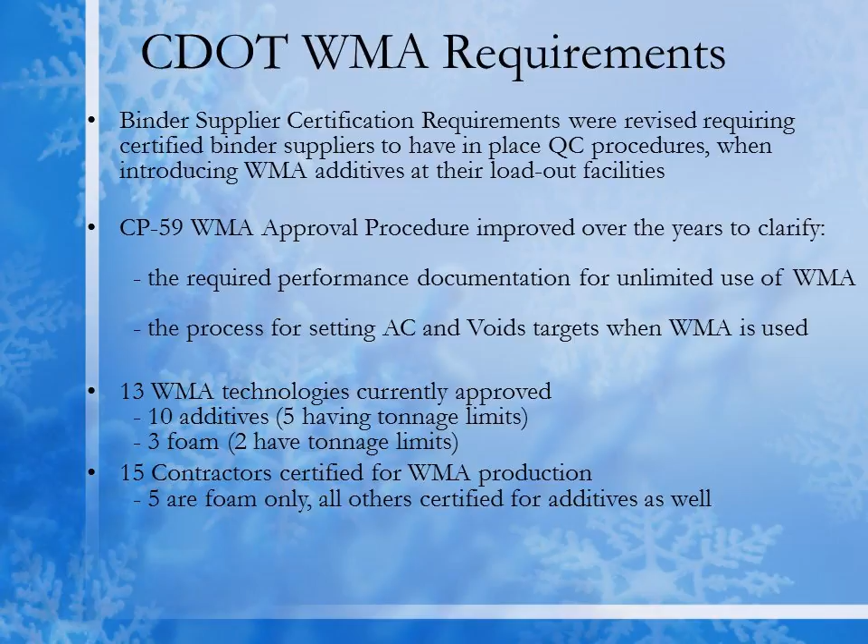Right now we have 13 technologies approved. 10 of those are additives, 3 are foams, and we have 15 contractors that are certified to produce warm mix on our projects at their discretion.

Let's go to the start of our warm mix use here in Colorado. It really started because we have challenging conditions to do typical construction in. I-70 west of Denver is one of the main corridors in our state and nationally to get from east to west and vice versa. It's largely how we supply our ski industry and all the other industries along this corridor. It is high elevation, and it has a lot of traffic, and it can be very challenging even where we're allowed to daytime pave in that particular corridor.

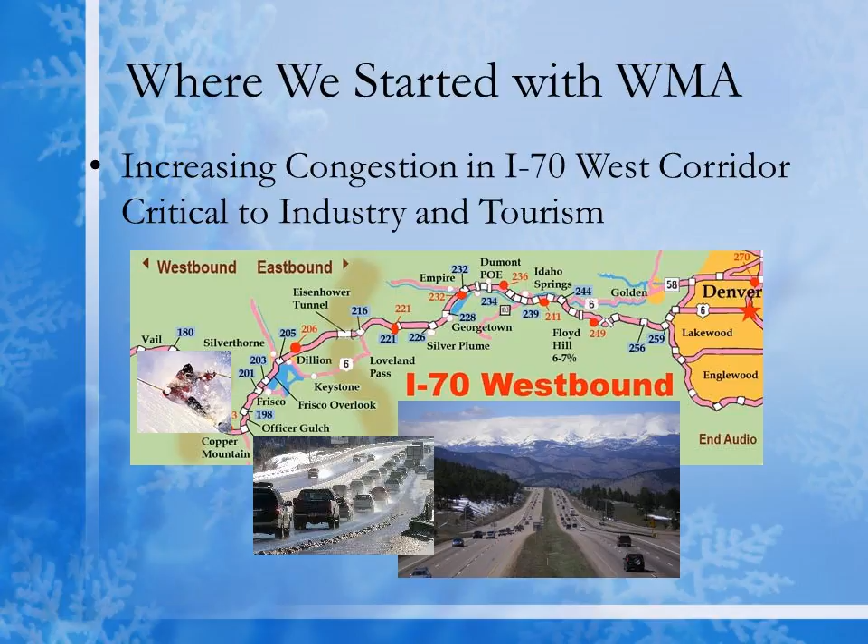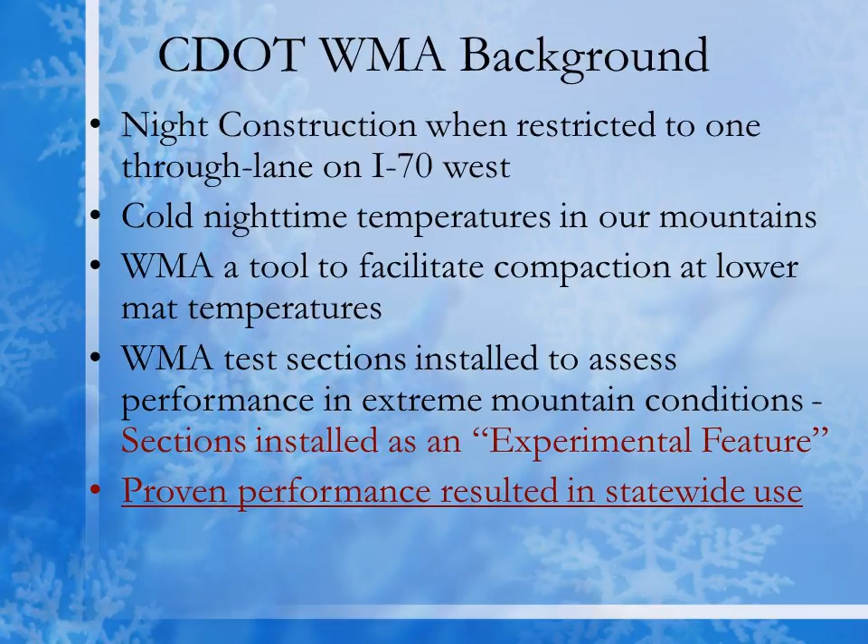Night construction is pretty frequent on I-70 because of traffic constraints, and at night it's even colder at 10,000 feet than it is during the daytime. As you can imagine, we use warm mix to facilitate compaction at those lower temperatures. We had test sections that we started with installing in probably the most challenging pavement condition in the United States, right at the Eisenhower Tunnel. I'll tell you about that a little bit. It performed very well, and we now have statewide use.

This project is 70 miles west of Denver. The lowest elevation is 8,800 feet, and it goes all the way up to the Continental Divide at 11,100 feet at the Eisenhower-Johnson Tunnel.

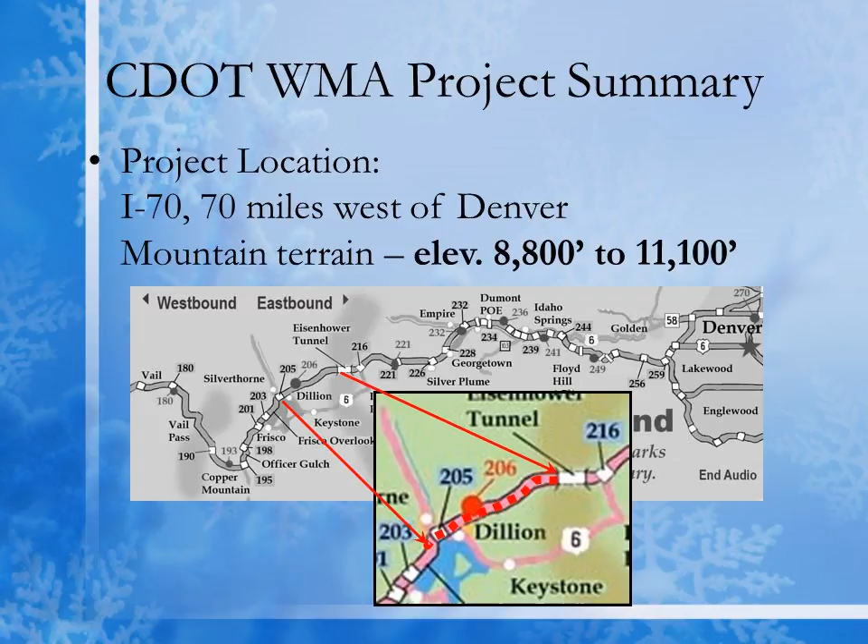Difficult conditions, 35 inches of precipitation a year on this project, 200 inches of snowfall. Look at the freeze-thaw cycles, pretty significant. It's a torture chamber for pavement. Very cool conditions in summer.

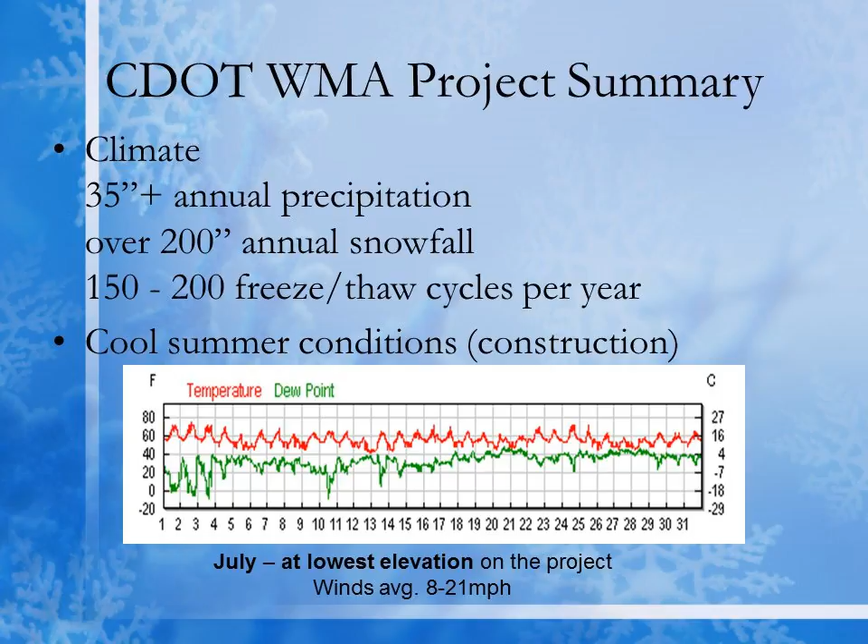I've already talked about this plot. This represents the lowest elevation on the project. It's much more challenging up near the Johnson Tunnel. 30,000 AADT, that was at the time of construction. It's higher than that now. 10% trucks. The project was designed for 4.85 million ESALs for a 10-year design.

Pretty extreme conditions in the winter. For those of you that have a Hamburg machine, it seems like child's play compared to the conditions that pavements have to withstand at this location. 65 of 76 days in the year after construction of this project, it snowed. 128 chain days—that means every truck is required to chain up before they can go up and over and through this project. So that's very, very hard on pavements, and that's where we built one of our primary warm mix test sections that got us going.

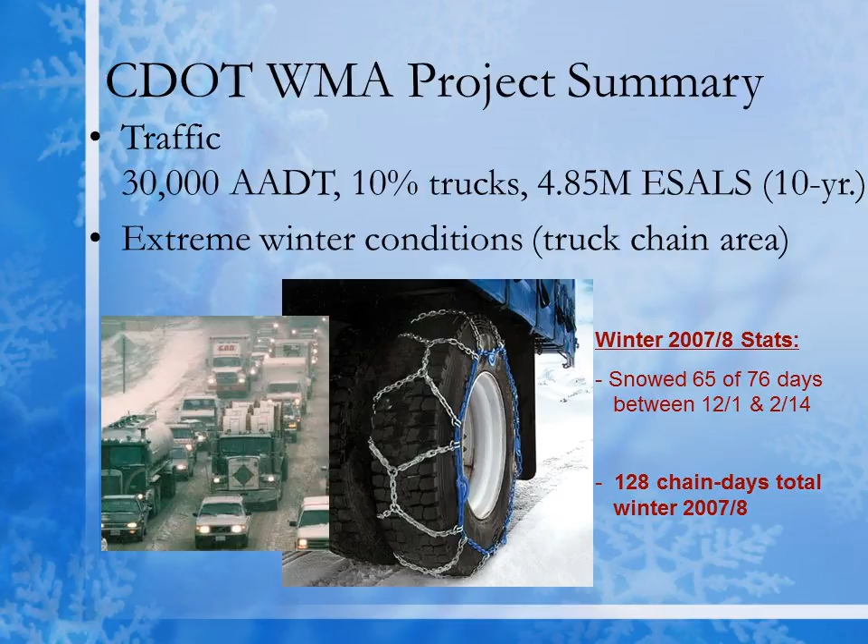This was a 2.5-inch mill and fill. We had Advera, Sasobit and Evotherm all demonstrated on this project. In our case, an SX mix in Colorado is a 1/2-inch nominal maximum mix, so you'll see that throughout. This was an SX mix, 58-28 binder, 75 gyration design, and full volumetrics for pay.

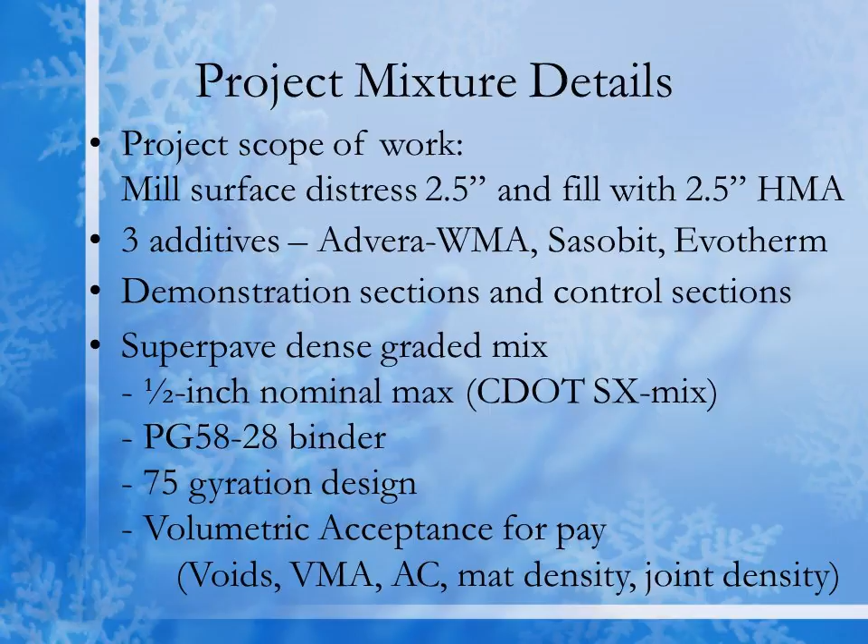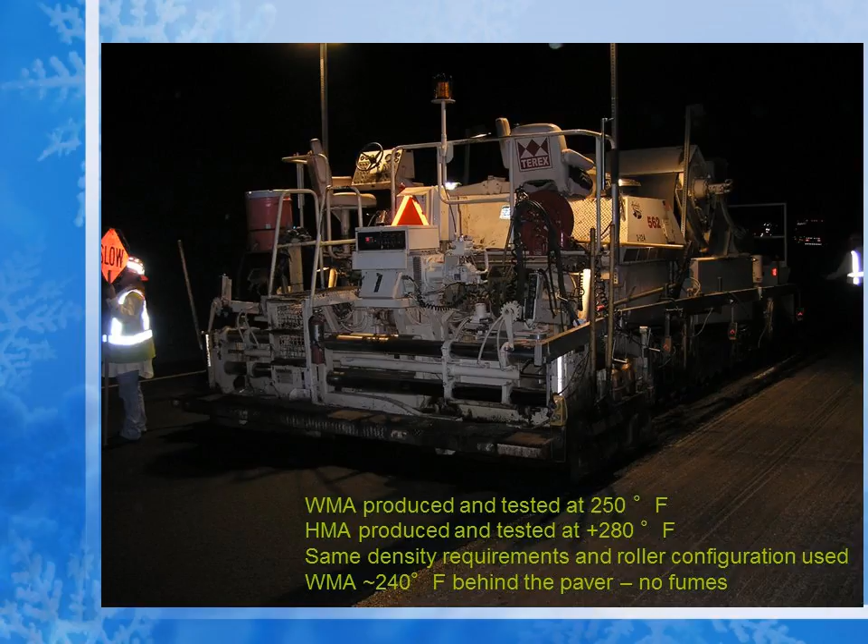The warm mix was produced at 250. The hot mix in the other sections on this job—we had a fully controlled demonstration project and then monitoring—was produced above 280 degrees. We had the same density requirements for both warm and hot mix, and the same compaction process was followed by the contractor. The warm mix was about 240 behind the paver. At nighttime at this elevation, in very thin air, you usually see a lot of fumes from hot mix. Not in this case.

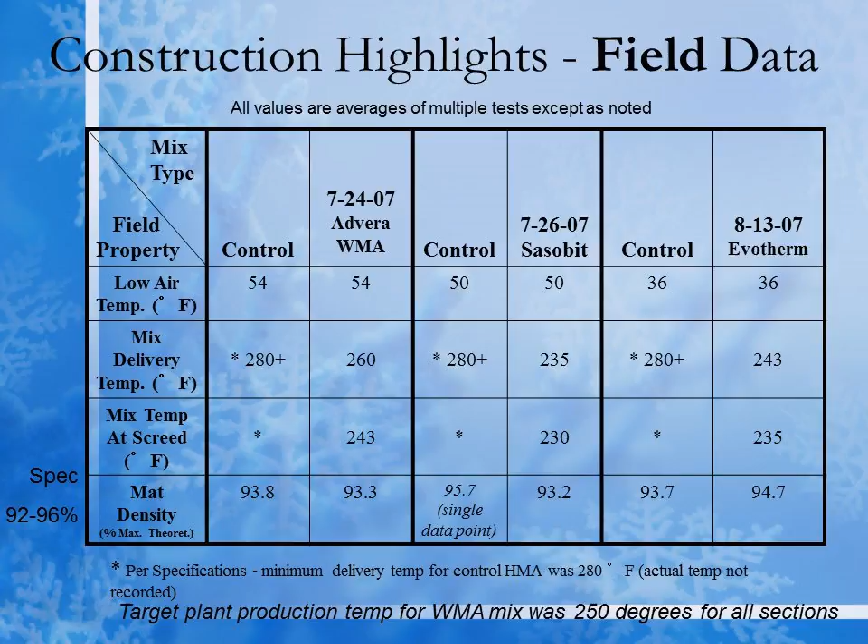We were down to 36 degrees paving on this particular project. You see the mix production temperatures there. It's worth noting the mix temperature at the screed—you can see right about where we needed to be throughout, 240 down to 230 for the mix behind the screed. Densities are all good, all within specification and comparable between hot and warm mix.

A little bit on the lab data, because it's worth noting that there will typically be an impact on laboratory voids due to the drop-in of an additive of any flavor. You can see we run all of our mix at our historic HMA laboratory compaction temperatures, which keeps us consistent and allows us to operate labs that test multiple projects.

We test them all at the 280 degree temperature as it was for this particular mix. We acknowledge that through testing up front, all prescribed in CP59, there's going to be an impact on volumetrics. We determine that at the start of the project, then set volumetric targets accordingly. In this case, we established lower volumetric targets for production because we're keeping the AC content at the hot mix level and adding the additive, which we know will impact voids, but we want to account for it so the contractor does not get penalized. You can see there was an impact on voids. It's worth noting, and making sure our contractors are aware and we are testing accordingly.

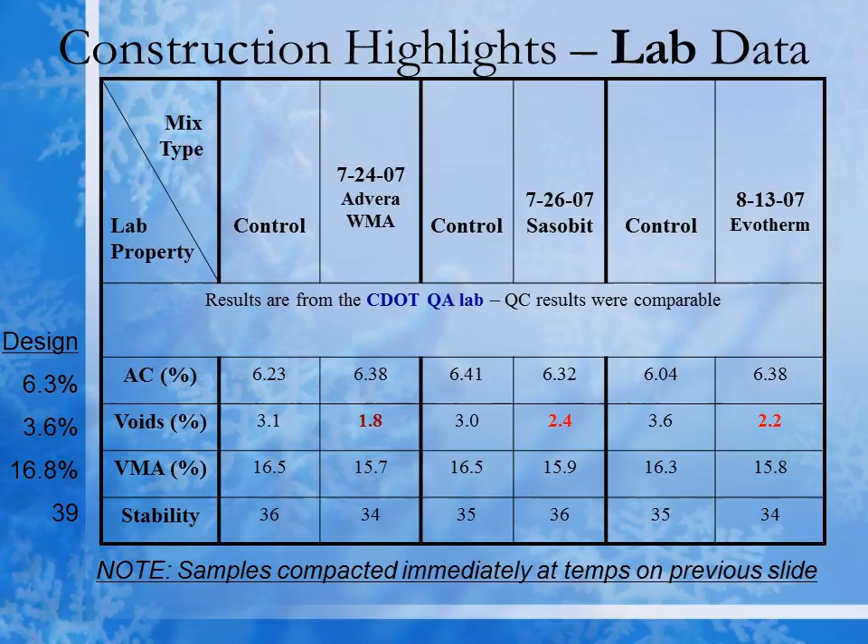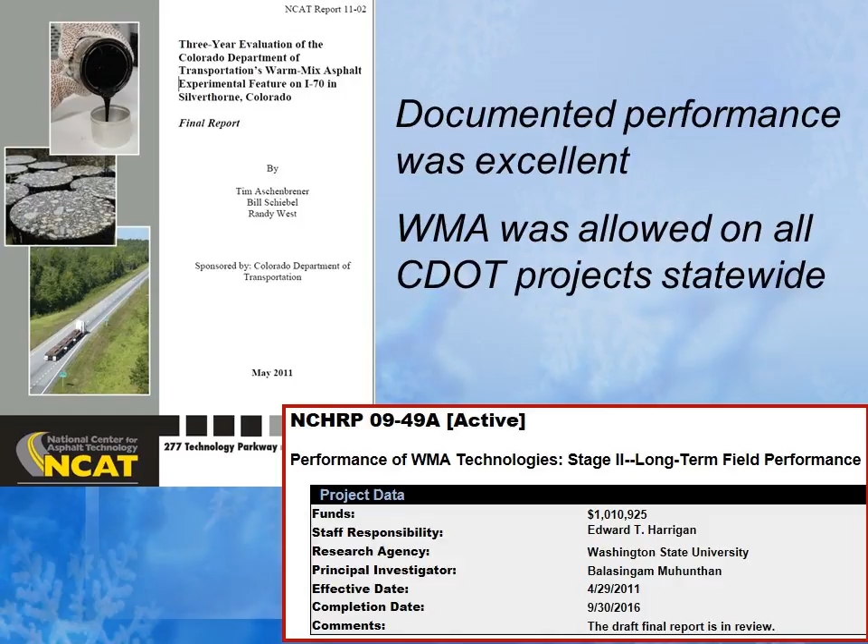So that was a cold climate challenging condition. We also have cold combined with other challenges. Let me tell you about this particular project. State Highway 9 is up in one of the north high parks up in the mountains in Colorado. Traffic's not real high, and the trucks aren't real high. It's a low volume road, but the elevation's still high, and it's relatively cold, -28 to -34 in the PG grading. This was an old pavement, last worked on in '82. Some as far back as 1969 was the last pavement work done on this project.

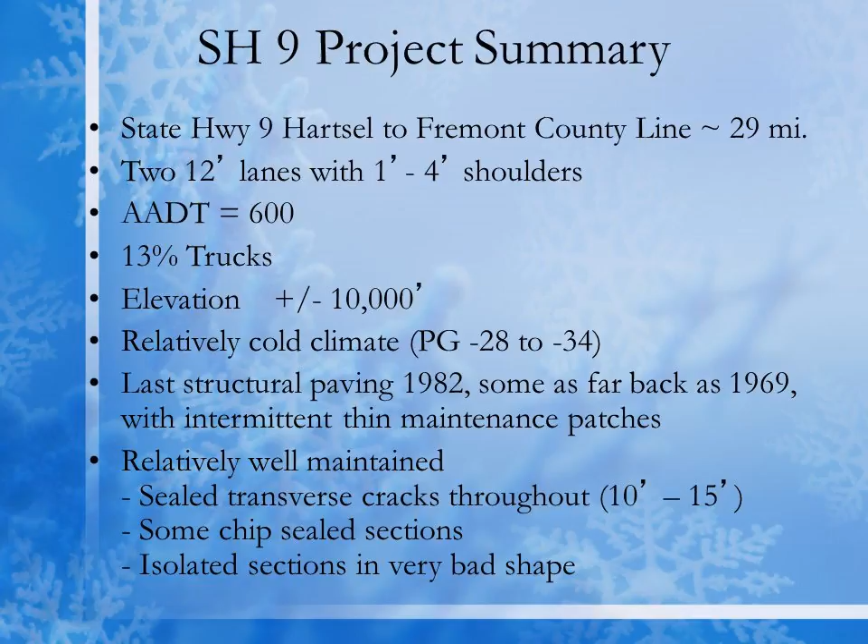But it did have pretty consistent chip seals applied, certainly crack seals applied throughout. So it was well maintained, but there were transverse cracks every 10 to 15 feet throughout this project. We obviously had to mill some isolated bad spots, but for the large part, the pavement was in pretty decent structural condition, just old. So we have challenges like many states with doing the best we can with limited funds, and for some of these low ADT roads, we have to limit how much money we're going to be able to expend. So we really needed to avoid an intermediate treatment just to get rid of the crack seal. We didn't want to do any heater treatments beforehand or shallow milling to eliminate that crack seal, because we've had routine problems with trying to put an overlay straight on a crack sealed pavement.

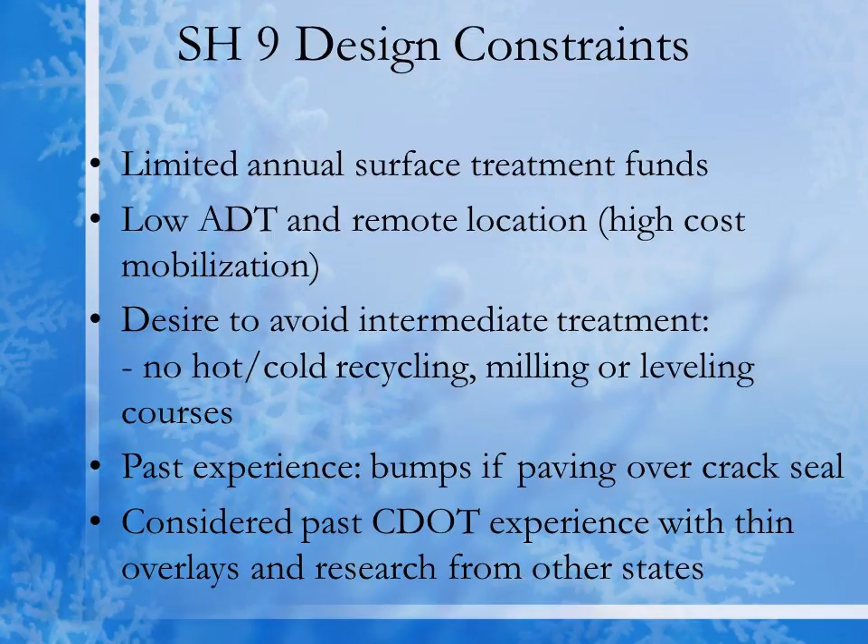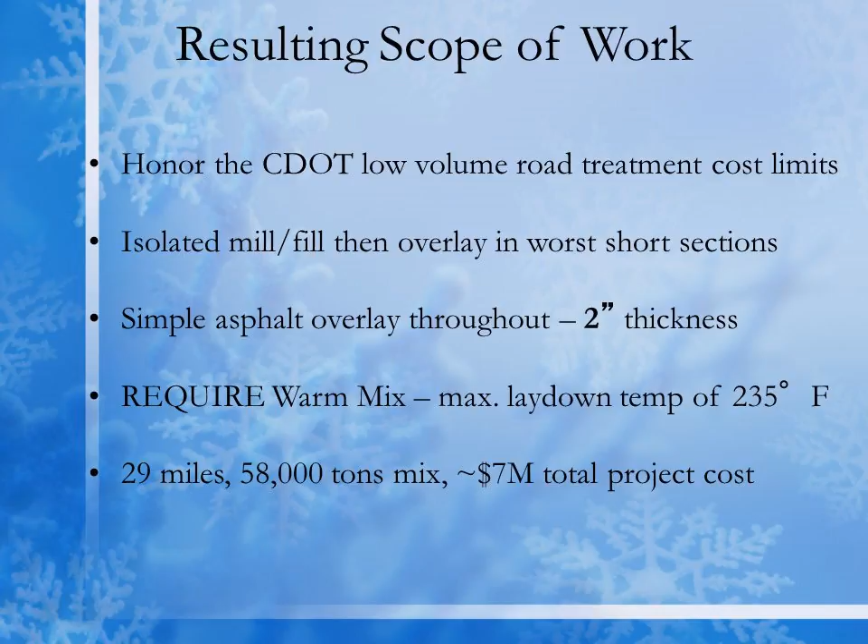Causes bumps almost every time. We really needed to follow our guidelines and restrictions statewide for how much we can expend on our low volume roads, so we simply did a 2-inch overlay on this project. Contrary to what we do on every other project now at CDOT, it's usually at the contractor's discretion - if he's going to use warm mix, he can pick an approved product that he's comfortable with and use that. However, on this job, we required that warm mix be used, and we required temperature behind the paver to be no more than 235 degrees. This was a 29-mile, 58,000-ton project.

There's always a little pushback when you try to mandate something that might shock people a little bit, so we dug an awful lot into other places where demonstration sections were built or research studies were done to try to correlate temperature of the mat being compacted to the prevalence of bumps caused by cracks and crack sealant underneath. We spent a long effort to make sure we were going to do something that made sense and might give us a good chance of mitigating those bumps in the overlay.

We had problems. We really needed to avoid this kind of situation. You can see peeking out from behind here, this is a brand new overlay on a similar highway adjacent to the one we're talking about on Highway 9. That new overlay went right on top of a pavement that should have and would have at the time gotten a hot in place treatment, a heater scarification prior to the overlay because of all that crack sealant. Funding issues arose, and the project needed to cut a section of the pretreatment, the heater scarification, out and simply put the overlay directly on the crack sealed initial surface.

Those bumps came right through, and we had a creative contractor in that image on the right sharpen up a motor grader blade and just skim those bumps off. So that's not ideal, we don't want that, and we're looking for ways to get around it on a project 29 miles long.

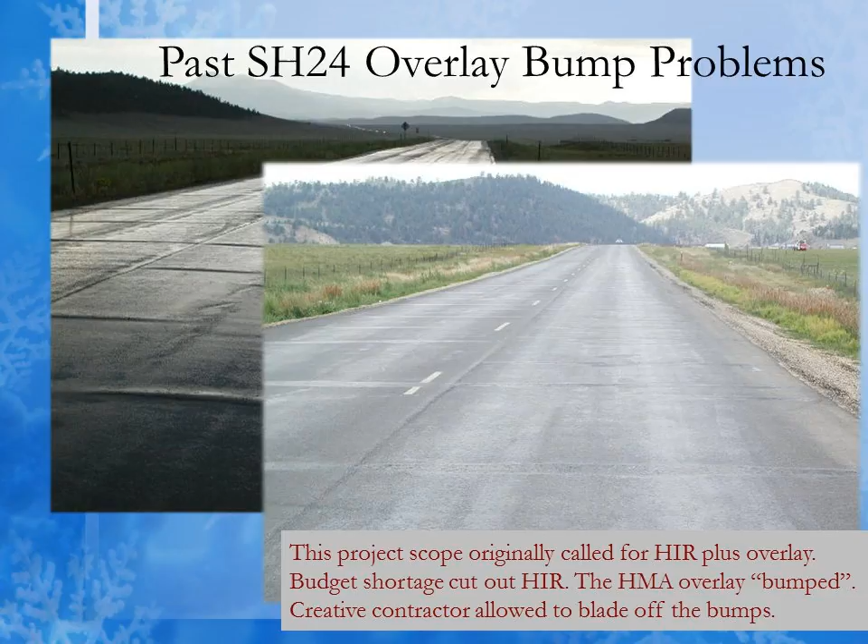Whoops, jumped the gun.

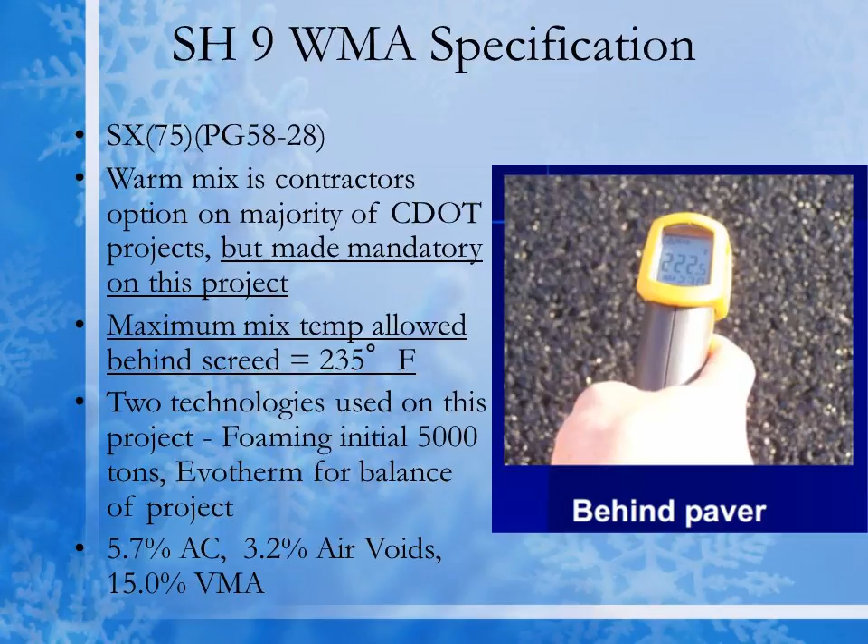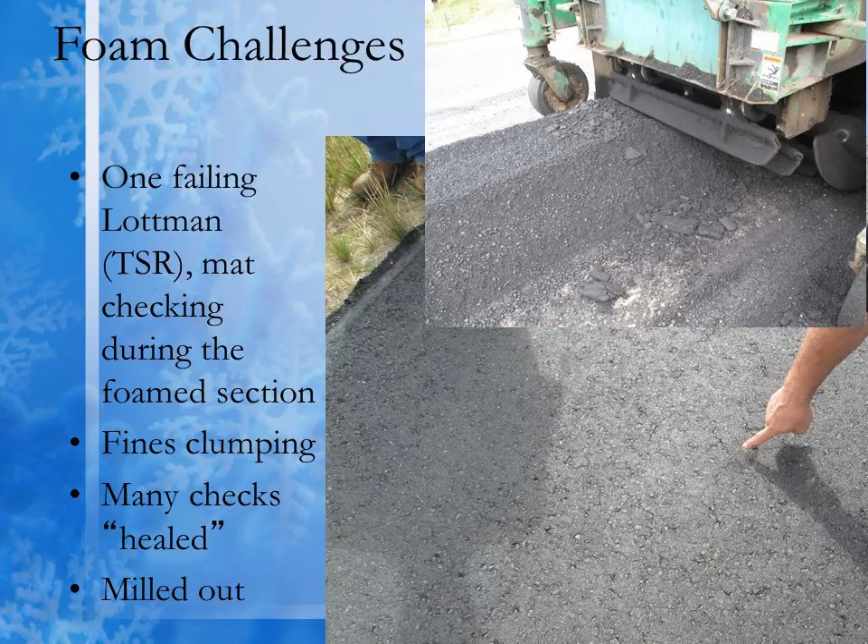We had some failing Lottmans. We call Lottmans what most people call a TSR, or tensile strength ratio. It's our way to test for stripping potential in mixes. We had some failing Lottmans in this 5,000 tons of foam warm mix that was placed. We had some fines clumping pretty significantly and some issues with that, and checking during compaction at that 235 temperature. Concerning to us, a lot of it was milled out because of those failing stripping tests, and then the rest of the project was completed with Evotherm.

So the mix was placed between 230 and 250. There was language in the specifications that we could, if we were diligent in not seeing cracks coming up, allow a slight increase in temperature to move through this project. It was pretty chilly at times, we paved into October, and so temperatures were between 230 and 250. No bumps were seen on the project, even in those areas with heavy crack sealant.

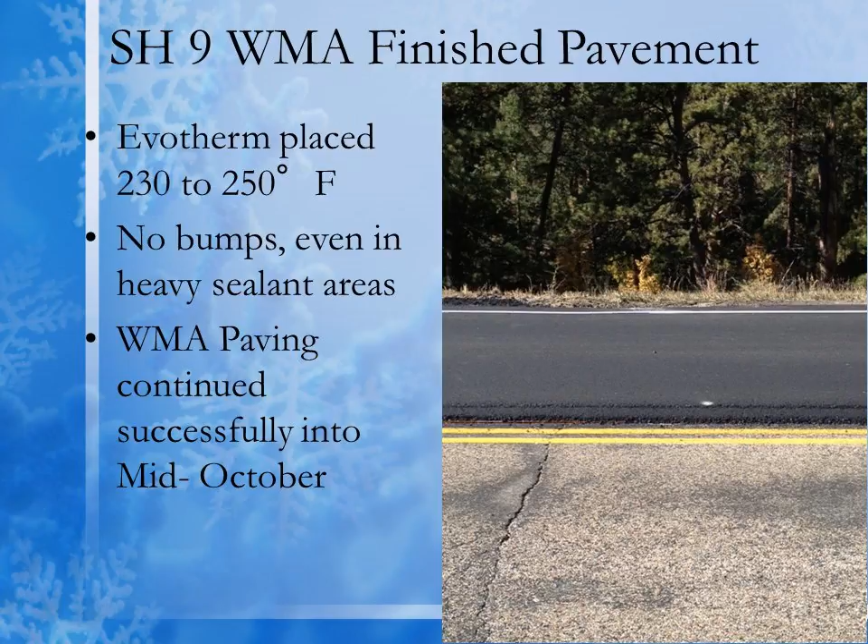So this is what it looks like today. There's some reflection cracks that have come through. This was placed back in 2009. There were some other mix dryness issues that were associated with the contractor's control, and so we see some transverse cracks coming through. But boy, those bumps are not evident in this project.

Highway 121, or locally known as Wadsworth Boulevard. Heavy traffic here in Denver, night paving as a result. This is a 64-28 mix, polymer modified, 75 gyration half-inch. 40,000 tons right here in suburban Denver, entirely night paving between Labor Day and Halloween, with temperatures below 30 degrees during the night paving on this project.

Very well done. CCA is the Colorado Contractors Association. This won their Project Management Award, almost entirely due to the warm mix, according to the project people. Just went very well, very high pavement quality incentives on the project. Density is included in the calculation of those pay incentives. One notable here from the project engineer, and maybe if there's discussion at the end, we can talk about it.

They did have a little bit of concern with potential for the mix being soft, even at 150 degrees, and concerns that it might be marred when they opened it to traffic. So a little bit of guidance they're looking for is, hey, is it okay to open some of these mixes with additives in them? I've seen similar things on that I-70 project.

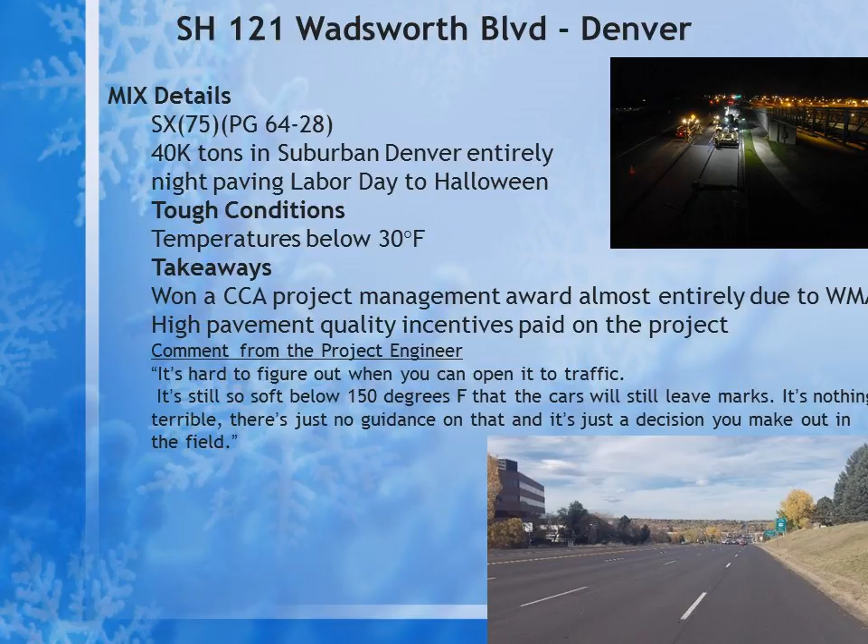Very well done project, though, successful.

This is on our interstate right through the guts of Denver, I-25, right near 20th Street. And you're right near downtown, right next to downtown in this location. This was a 100 gyration mix, SX, and a 64-22 binder.

This was placed between, for a lot of reasons, had to be placed between December 13th and December 17th. Very cold weather, snow on the ground, night paving, high teens at night. One of the takeaways was, hey, this was a Christmas present to get something buttoned up, so Merry Christmas, Denver.

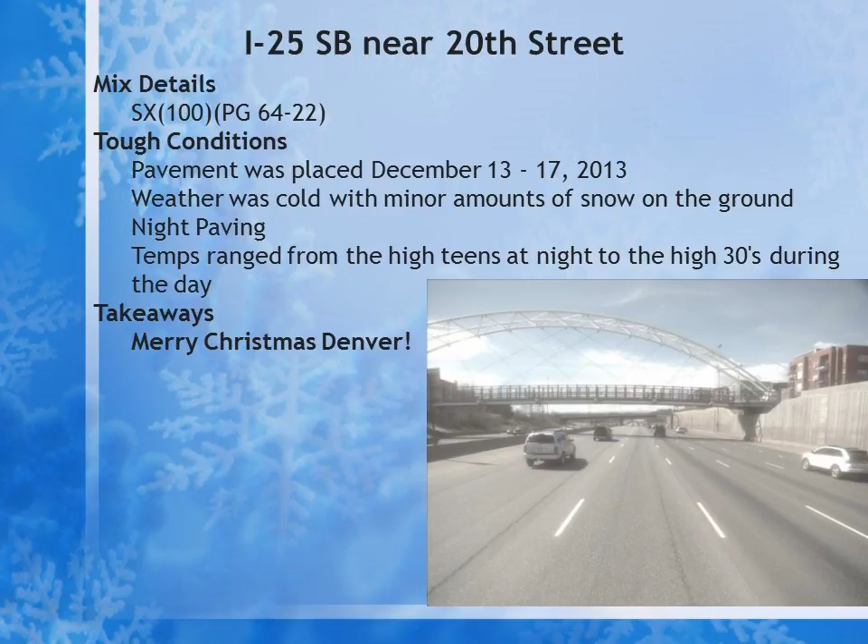This is State Highway 194, down in Region 2, a rural location, but with very similar motivations to the Highway 9 project up near Hartsel high in the mountains. Not the added challenge of low temperature conditions at 10,000 feet, this is probably around 5,000 feet or so, but there were very significant transverse cracks on this project and the need to simply get away with an overlay.

This is a 75 gyration SX mix, 64-22. They had a max of 235 behind the paver. Again, not a cold climate, but we really wanted to make sure we didn't have those ugly bumps coming through. You can see in the photos here, there are some bumps that did come through. In the right lane, they're addressed in that location, but in the left lane, there are still some bumps that came through. There were apparently some wrestling matches at the contractor's plant between the owner and his son trying to really dial in what the temperature should be for running that plant, because it's new for warm mix, and it's hard to believe that you should actually run it at a lower temperature. So there were some battles at the plant, and the mix came out a little hotter at times, and we saw some bumps come through.

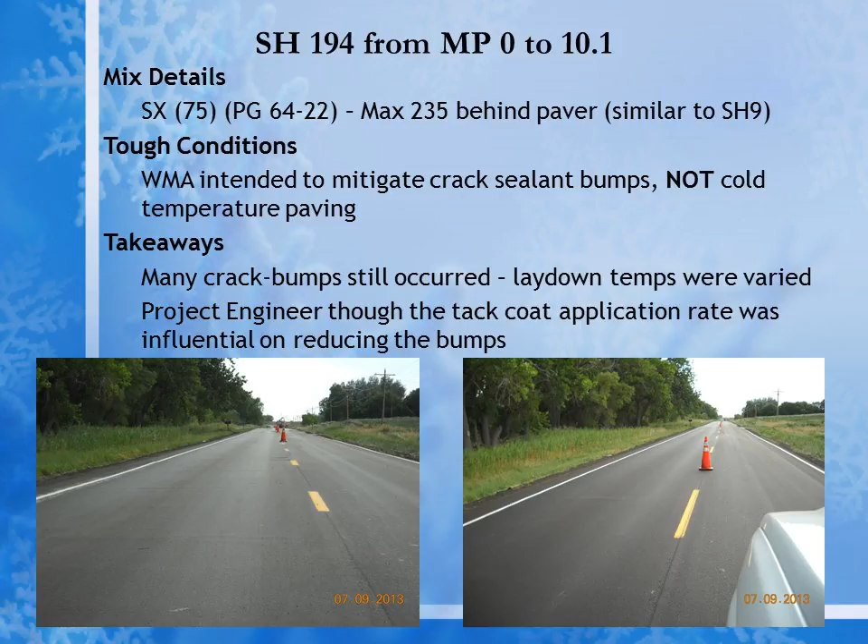Here's another one on I-25, down by Colorado Springs, a large metro area immediately south of Denver. This was a 100 gyration SX 64-22 mix. This was a huge design build project that they really needed to wrap up before winter fully kicked in, although they didn't quite make it.

So we went right into December with paving on this major reconstruction and widening project. It was necessary, they found, to limit paving to 25 degrees and higher and 15-mile-an-hour winds. That's way lower than we would typically pave. But up to that point, they could get good density and did so on the project. They had great density results, but they began to drop in density if you went below that. So a little bit of project-specific knowledge had to be learned on this. They did that through increasing density testing early on, to make everybody comfortable with what they were capable of paving at temperatures lower than we've historically been used to.

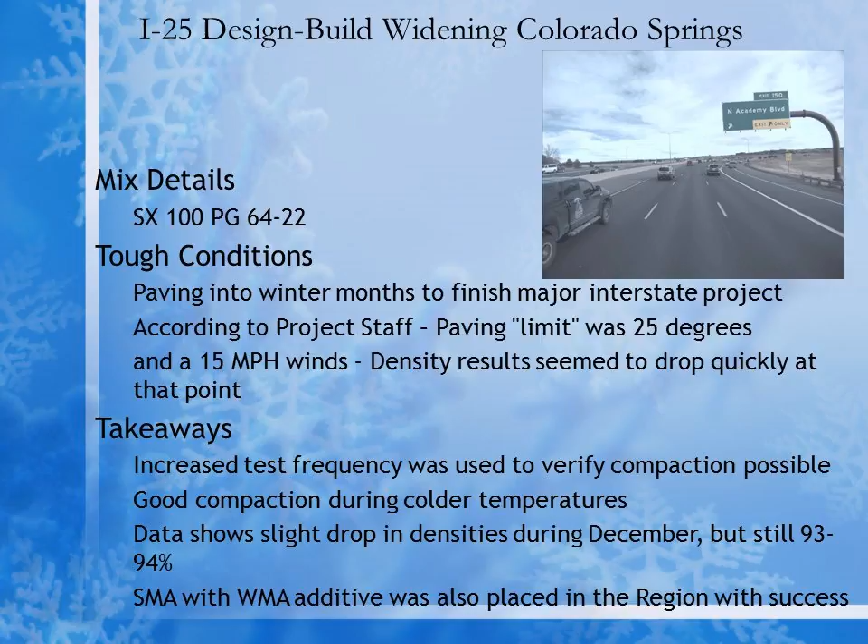Good compaction even during those colder temperatures. Things did start to drop in December, but they were still 93, 94 percent, right there within specification. The project people on this one wanted me to note that they've also placed SMA in their region using the additives that were used on this project. So good success here in a very big project.

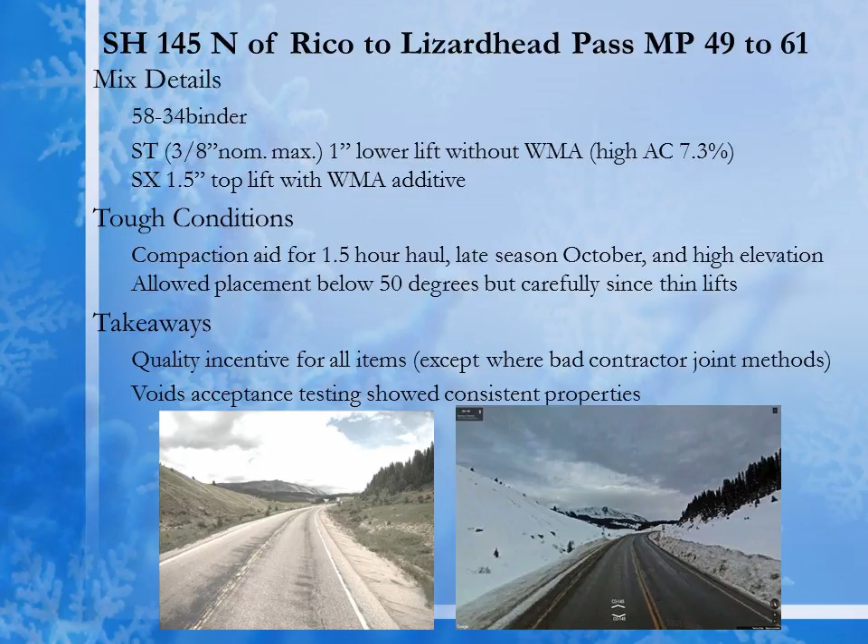The takeaways on this one: they got quality incentives for all of the items. It did have some bad joints constructed, had nothing to do with the warm mix, but in control of the straightness of the joints, it's difficult to get density on something that you can't match. Very excellent properties by the contractor and his compaction on this mix in a pretty tough location.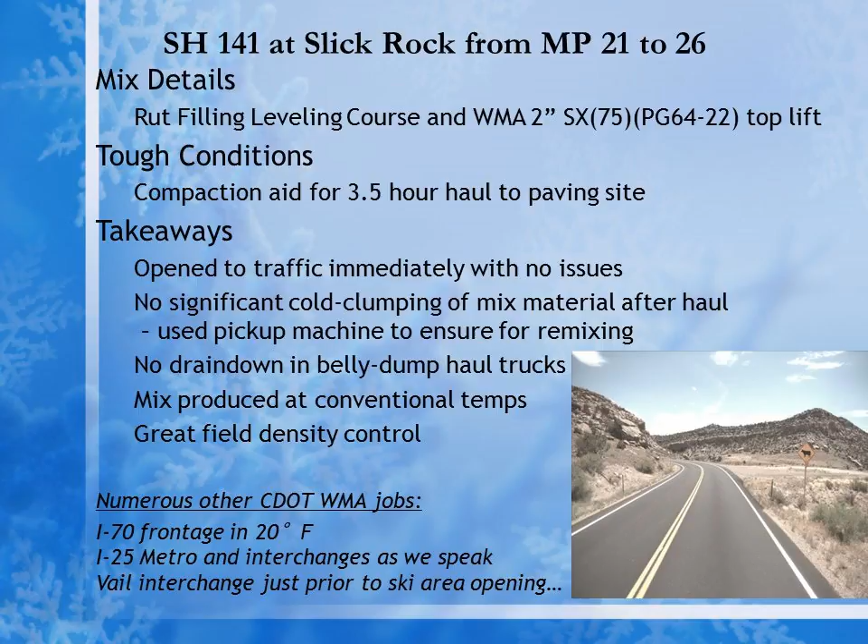So we have a lot of project examples here. I tried to give a good cross-section of the different ways we've been able to benefit from warm mix. I think we've really been successful, and we've had some conditions we just couldn't have dealt with without the ability to compact in tough conditions and the additives that have helped us out.

We've really been able to maintain the quality of our mixes even when using some types of additives. Part of that is we've got a process in place to ensure we still have the asphalt content we've historically had, and there's no method to reduce that because of some compaction aid in there, so it's been excellent. Our process has proved itself, I think.

We've been able to increase haul distances, we've been able to extend paving seasons, we've had excellent compaction in very tough cold conditions, and we've been able to, when needed, target a specific reduced paving temperature, as I've shown in those slides with bump issues.

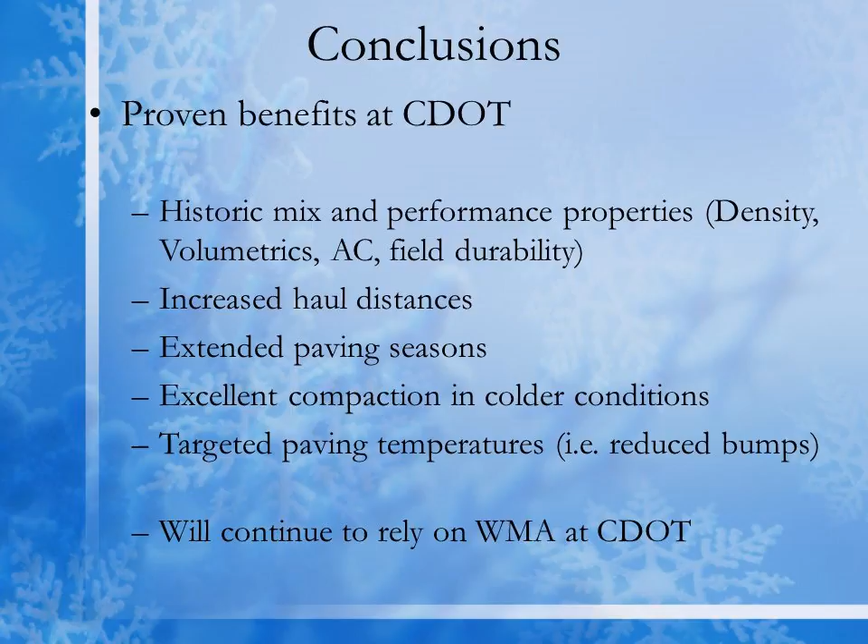We're going to continue to rely on warm mix in Colorado. It's just been too good for us and helped us in so many ways. So that's some cross-section of experience here in Colorado, paving in challenging conditions.

I'm going to show you something a little warmer here while you're thinking about your questions. Winter's upon us - for those of you going to tropical locations, enjoy yourself.